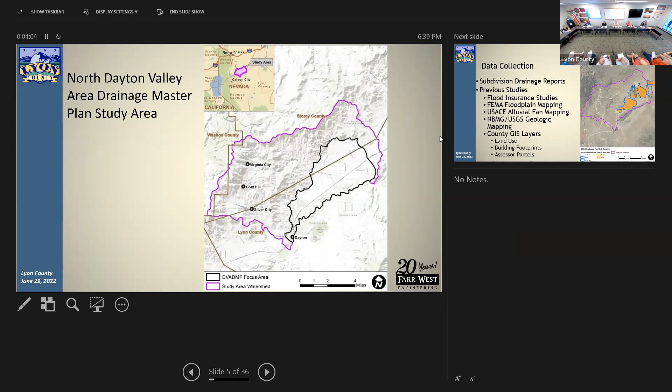So starting out with any drainage study is a lot of data collection. So Farr West and their team took a look at the past subdivision drainage reports that were prepared for all the subdivisions within the area. Also looked at previous studies such as the flood insurance studies. Mainly those are funded by FEMA.

Also looked at the FEMA floodplain mapping, the U.S. Army Corps of Engineers alluvial fan mapping. That's kind of what we show in those yellow orange areas. Those are the alluvial fans that are common on the north side. And the outline of them shows where there's a risk rating. So when there's storms, a lot of that alluvial sediment is moving through. So they're rated from medium to high. That's based on the Corps of Engineers mapping.

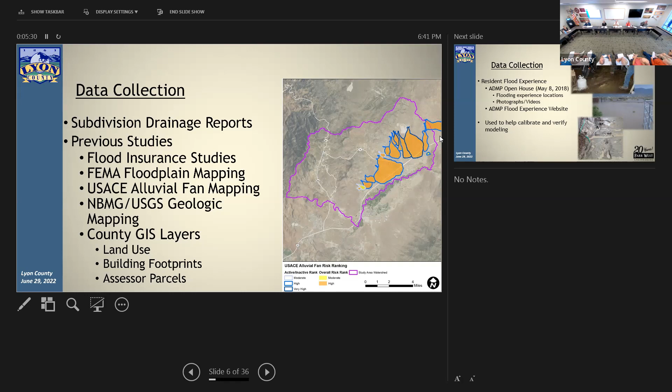Also, they coordinated with the Nevada Bureau of Mines and Geology, NBMG, as well as the U.S. Geological Survey for the geological mapping. And then they also coordinated with the county's GIS layers for figuring out the land use and buildings, et cetera. Because this model is a two-dimensional model, going into a little bit later, it showed how when a storm hits, how it moves through the areas, hits buildings, culverts, et cetera. So the GIS and starting with that data collection was the building block.

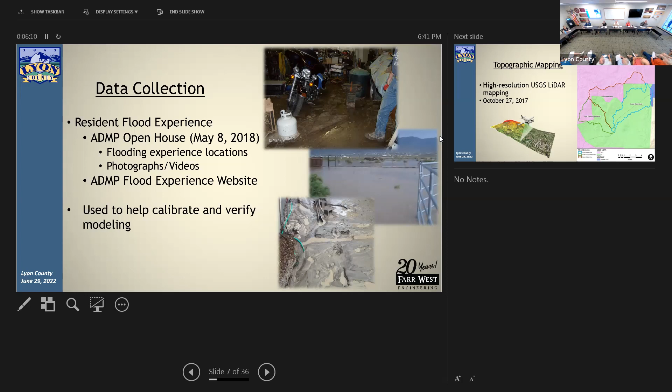Also, back, that's well over 4 years ago now, we had an open house where we got feedback from the public to talk about the areas where they've lived for a long time. Like Joey, I think he was here several times at this meeting, talking about what their experience has been, photos they've shared of where they've seen flooding, what affected their house, et cetera. And some of those photos are shown here. That was really useful so that you could calibrate the model of what it showed versus what was actually happening and what people had experienced.

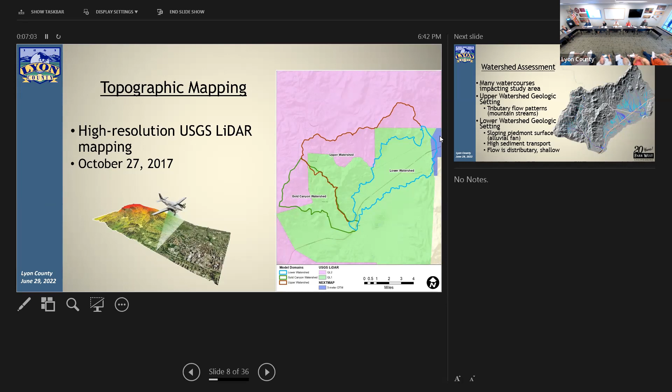The big issue was the topographic mapping. And the catalyst for starting this drainage master plan was that the USGS was going to be doing a LiDAR flight. LiDAR is a light detection and ranging technology that uses light, and they fly it with a plane, and the head measures down what the reflection is, and it creates a very detailed three-dimensional map. It's interesting that USGS was doing it to try and locate fault lines within this area. So we piggybacked with them to use that technology to create a three-dimensional model of the whole area that we could use within the model for simulating the storm events. And that was flown back in October of 2017.

So then based on that LiDAR, there's an outlook of what the detail shows. What that helped us, the modelers, understand about the topography out there is what's going on in the upper watershed. It's really steep. So understanding how the channels feed down into the lower valley area, and how those alluvial fans, or what they call Piedmonts, are fed by that runoff. And also looking at areas where there's high sediment transport, where there's a large runoff, people get sediment going up their basements or in their backyards, et cetera.

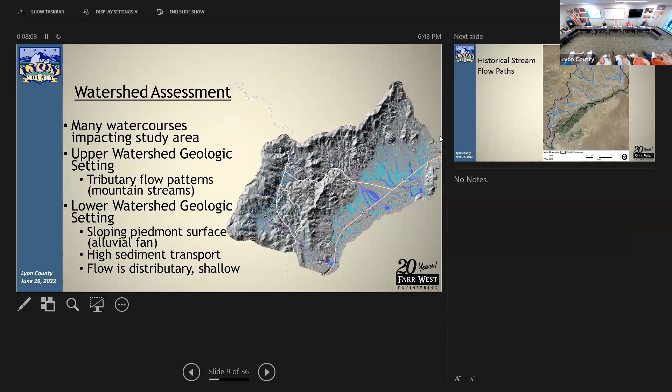Also it helped them see how the flow is distributed in shallow flows and how those shallow flows meander in alluvial fans during certain events. And you can see in this graph the blues, maybe I'm a little ahead of myself, but that's what a 100-year storm event looks like coming off of the mountains and flowing down to the river.

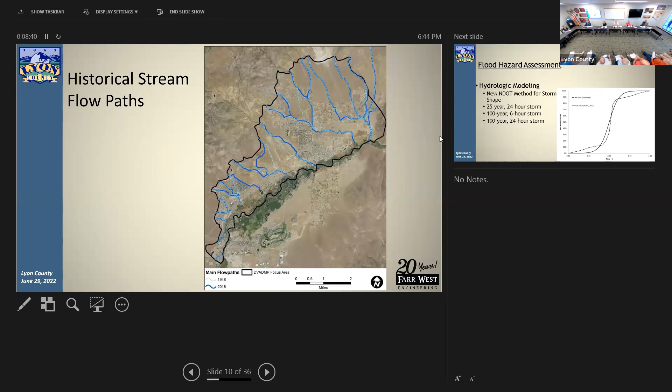So also we took a look at historically how the runoff has occurred, mainly the major channels. So you can see in the light blue where historically, back in 1948, when Jeff Page graduated from high school, and you can see how things change, and then up to 2018 with the dark blues. A lot of it can be changed by development, but a lot of it's just naturally how things change with large storm events, and it skips the bank, creates a new path.

Sorry about that, Jeff. No, you're fine.

So next was doing the hydrology portion of it, so running the storm event over the site. We use the NDOT's method for a storm event in this area. And we looked at 3 different types of events: a 25-year 24-hour storm event, a 100-year 6-hour storm event, and a 100-year 24-hour. Those are kind of in line with the Title 15 code for Lyon County on how we require development and others for stormwater detention, sizing culverts, et cetera.

And so that graph kind of shows on time and percent precipitation what happens, how a normal storm flow passes through and its intensity over that unit of time. So it shows us 1, but that could be over 24 hours or 6 hours. You just multiply it by that hour.

So then the flood hazard assessment, this is kind of where they got into the details where they started running the model. They took that LiDAR surface, applied that storm event over it, then see how the water comes off the hillsides and floods through the area. So they created like 3 different models, one in the upper watershed, the lower watershed, and the Gold Canyon, and they kind of knitted that together, just because the data was so huge, they had to break it up.

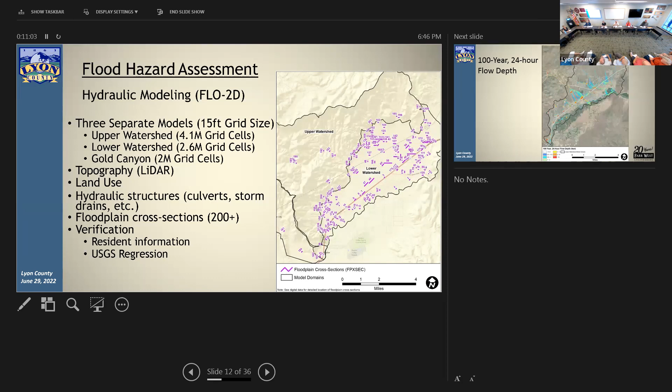There's a couple open seats up here if you want. Oh, okay. Nancy, can you hear me? Sort of. All right, I'll speak up.

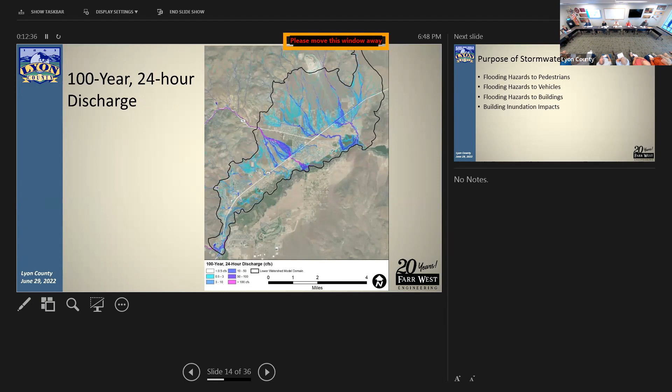So now we kind of know where the storms are occurring, where the water is running, where it's flooding properties, et cetera. So next: what are the necessary improvements to mitigate these flooding issues? We looked at the flood hazards to pedestrians, to vehicles, to buildings, as well as the inundation depths to buildings. That could be businesses, commercial buildings, as well as residential.

In the model, with that LiDAR, we actually got a footprint of every building and pretty much knew its height. So when that model runs through, if you've got it zoomed in, you can see how the water can move through the subdivision during that flooding event.

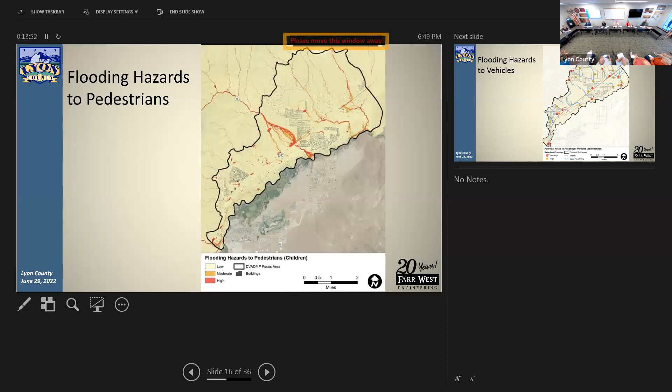What we used as pedestrians were basically small children, about 60 pounds or less. That's the risk factor, versus David Burketta's size, who's a big guy.

Then we looked at the hazards for vehicles, mainly where streams or runoff hit a roadway crossing. The benefit was looking at very high versus high risk. The very high were the red stop signs, and the yellow was where there's high risk. That gives the roads department an idea of where they should put up signage to warn pedestrians and vehicles not to cross this area, where you can see water crossing the bridge or the roadway.

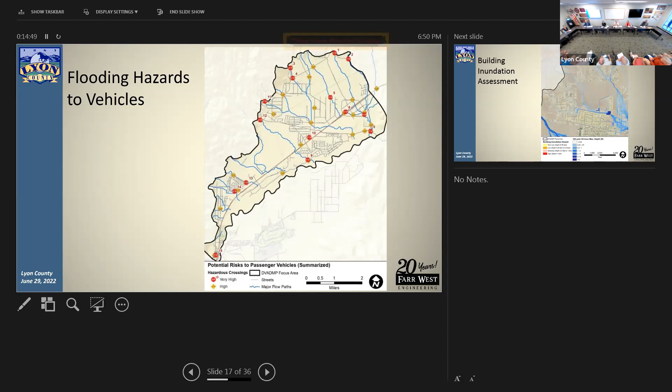What the data is used for in the future for the county, if it's adopted, is it allows the county to know where those depths are. So if someone wants to build a garage or a home, we can tell them what the finished grade should be so that it doesn't get flooded based on this information. So if you put in a permit, Andrew and his crew can zoom in on that area and say, okay, you need to be at this elevation.

Next, with that flooding, they asked, what is the economic cost to the entire community? That's where FEMA has this HAZUS analysis, a program model that says, if you have this flooding and it's this deep and you have this type of building, what are the damage costs for the replacement or repair of that facility?

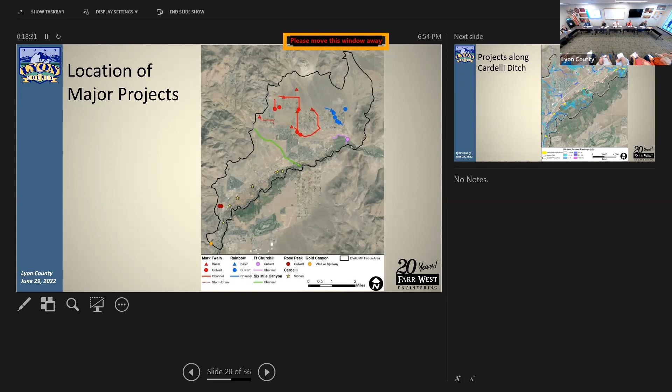And then 2 other areas are in bright green. That's the 6 Mile Canyon, which mainly just said we need to create a bigger channel, just to channelize that, so it doesn't go into that alluvial fan type of a situation. And then the last are along Cardelli ditch, which are those diamonds. I'm sorry, not diamonds, the stars.

And then this kind of zooms in where along Cardelli ditch there's a lot of those drainage paths that cross over or hit the ditch. And what happens is that under the 100-year storm event, it just takes the ditch out. So we're looking at, okay, what can we do to get the water either over or under the Cardelli ditch so that this will mitigate irrigation, the uses of irrigation, as well as for safety.

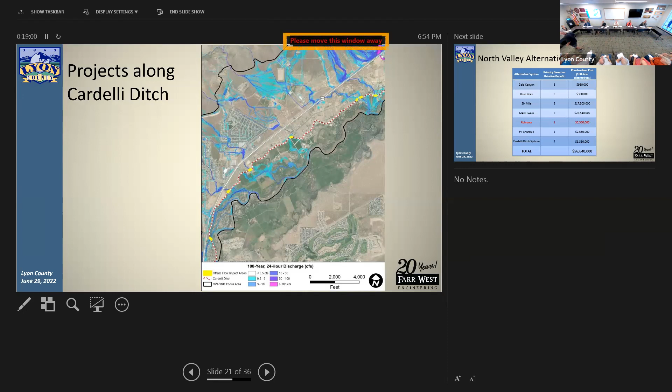So that concludes the North Basin. I'm going to move now on to the South Basin. I'm going to skip over the process they went through to do all the hydrology and the LiDAR and all that, because basically it was all that same data. So we took it another step and moved over to the South Basin. So here again, I won't use Jeff's name again on this, but it does show the 1948 drainage areas and the old channels and the new channelization through the basin area. The limits of this project are shown in yellow, which is basically everything south of the Carson River, and then up about midway up the hillside of the foothills there.

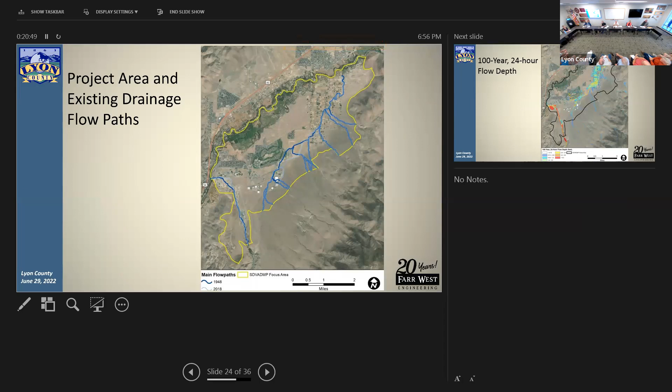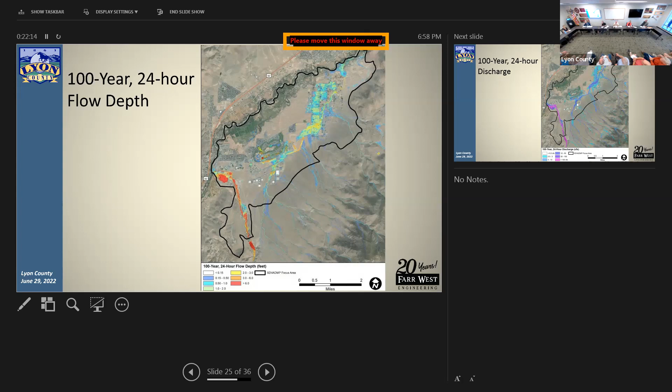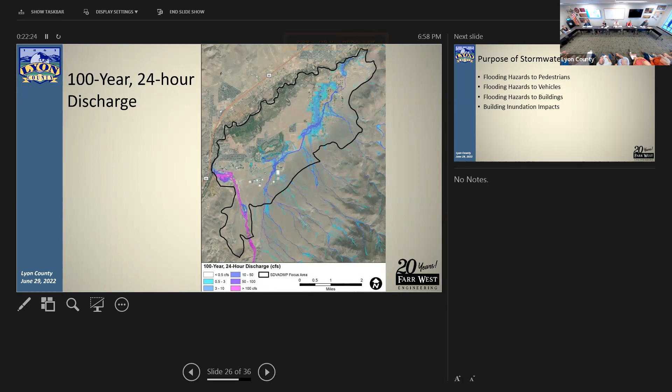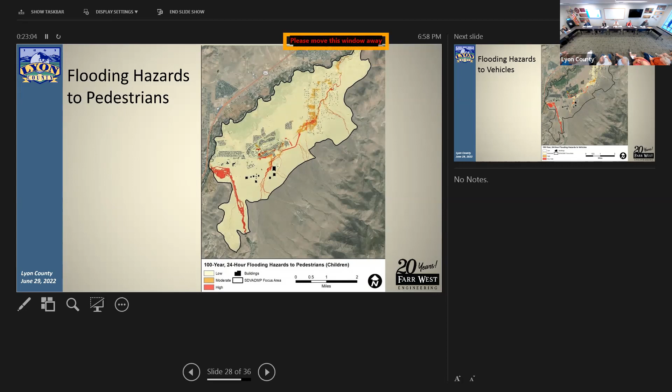Same process to look at what are the necessary stormwater improvements. We used the same criteria for looking at pedestrian risks, vehicle risks, building risks. So here we saw where the high and moderate risks are identified for pedestrian crossings, or you can just be out in the backyard. You can see where most of the drainage is staying within natural drainage areas or within detention ponds. But you can see that in areas where it gets really flat and spreads out, in the Ranchos area, the runoff has a hazard to small children.

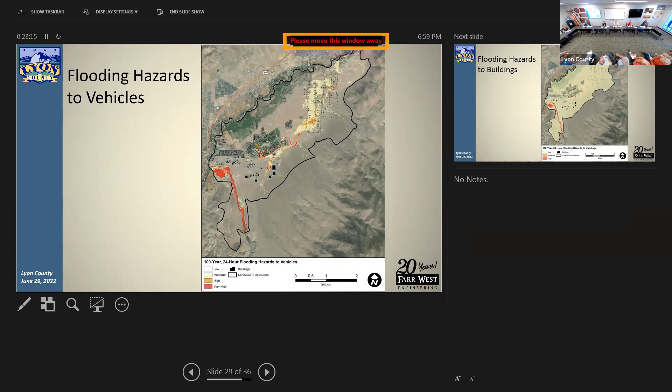They have water at your threshold, but a lot of it's going to be in the Ranchos area. There are some areas around the golf course that were identified in this model. And this shows the building inundation assessment, zooming into the Ranchos area where we saw that there were quite a few homes. But historically, I think most of you who are from the Ranchos know that that does occur during the large storm events where you've had that flooding. A lot of it starts picking up at the intersection of Sutro and Dayton Valley Road.

And then we ran the FEMA HAZUS model to quantify those costs. And again, the 100-year 24-hour storm event is the most costly. This one ended up being about $7.65 million. You recall the North Valley was about twice that. I think it's just because of the density on the north side, and there's more commercial and industrial properties on that side versus the South Valley. And you can see how it's broken down; the residential takes up almost 80-90% of the cost.

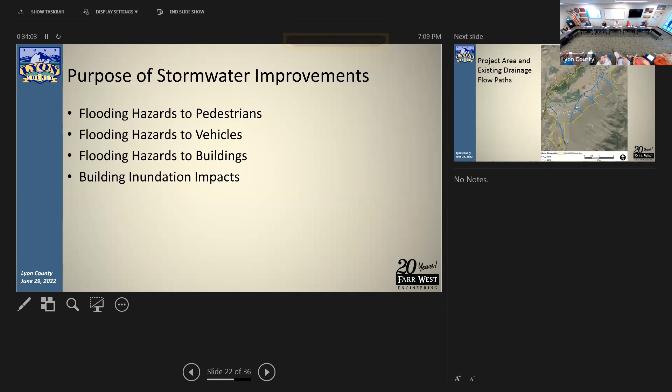However, it seems to me like some retention ponds up into the basin could be some smaller ticket items. Because if we're waiting till phase 9 to get the big bang for our buck, the majority of us are gonna be dead. You know what I mean? So, when the engineers came in and did this, did they offer up some short-term solutions such as retention ponds?

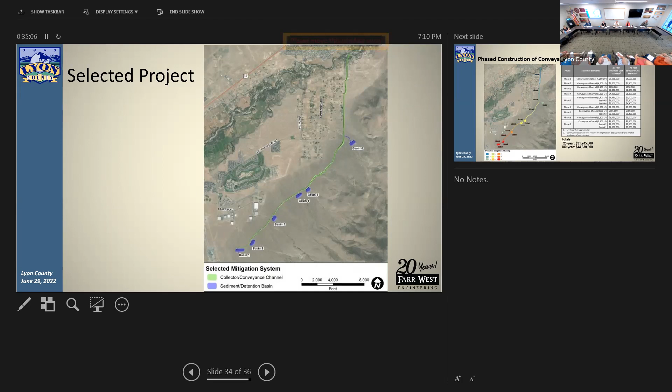Not that I recall, but I'm a civil engineer as well. When I look at this, what's shown in the blue, the drainage basins, those could be built first to serve as a retention of the runoff from those areas, and then slow the flows down, drop the sediment, and then let it continue on. And maybe with the control of that, you could slow down that flow, so it's not as big of a hit further down.

And then as you put in a road, or you put in the channel, they can start collecting that and diverting it all to the river rather than let it just follow its natural path. So there could be a step we can take to soften that.

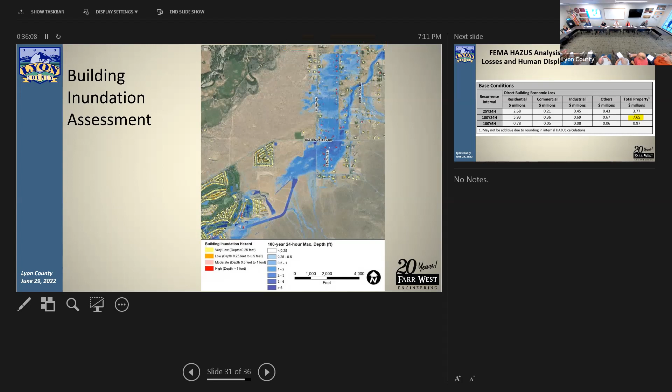So if I may, if you look up at the map, there's already retention or detention in place in portions of the project that need to be cleaned up. So that's one of the short-term things we could do. The deep dark blue, big white area there is one example. In 2015, 2017, and in 86, 97, 05, that's where it all came off of there. The difficulty that we have is we don't own that. It's private property. So we did do some work after the 17 event, Dustin?

Yes. After the 17 event, and that was a fun event, we met with the property owner. They gave us permission. We went in and did a ton of work to clean some of that out. The problem is once you have a significant rainstorm, it doesn't even have to be a flood event, those areas fill back in with silt very quickly.

And I'm not here to cause another controversy, but we have a large number of people who like to ride their ATVs out there. They destroy our basins very quickly without even realizing that that's what they're doing. They're just up there playing and having a good time. But there's a challenge with keeping those maintained to take that water. So that's part of the difficulty of it.

But we do have things in place that, yes, we can do stopgap measures and band-aid it along until we get the entire thing built. Part of the reason why we're asking tonight for authorization to move forward is the majority of the pre-engineering is done. We can apply for EPA grants to start working on these projects and to start building the infrastructure.

It won't pay for the whole thing all at one time, but it gives us the opportunity to keep moving forward, either EPA or mitigation grants through FEMA. So that's why we're asking now, because we have the pre-engineering done. There's been more money put in by Washington into both EPA and mitigation dollars. So we're trying to get competitive with the rest of the state and be able to get funding to put those things in place. So this basically provides justification for us to implement it.

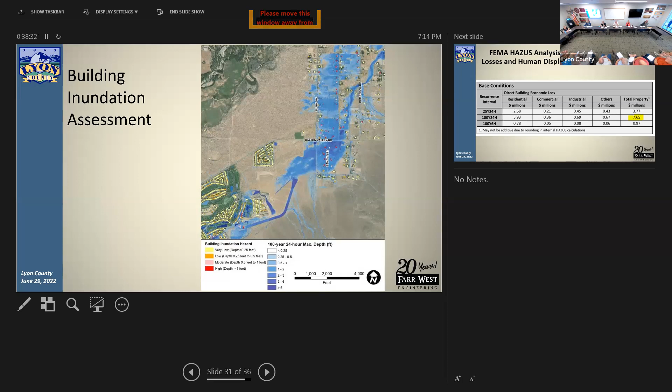Yeah, so on the El Dorado Canyon, because there were no residential areas at risk, and it's within that very defined area, and it's not jumping its banks, in our improvements we're not even touching El Dorado. We're catching everything to the east of it that's coming down and moving off to the east, that's hitting the airport area, the industrial park, and the residential.

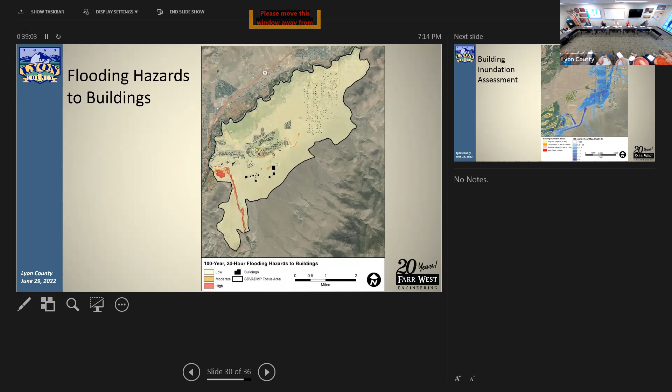So go back to that one slide that had the phases on there. Yeah. Because El Dorado shoots directly into the... Right, because it comes down. So what I'm curious about, because this is where a lot of the runoff comes into, is down here in this area. Right. So did the study look at doing something in the interim until we can get this built, to give some protection to these folks down here?

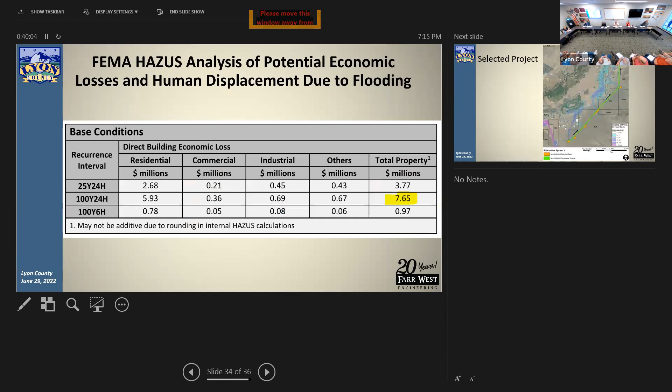Yeah, there you go. So the last two basins, the farthest upstream, are capturing that one drainage area that's going through just before the industrial park. Because again, we identified BLM, and doing anything on BLM takes 6 years.

Well, now you brought that up. And this is probably a question you can't answer. But is there any way we can make BLM pay for some of this, since it's their land that the water's running off of? Probably no. But you guys are in the process of obtaining that BLM land. So we'll still pay for it. Yeah, exactly. You'll pay for it, yes.

Commissioner Ogden. You basically answered the question I had, what can we do to mitigate the problems before we worry about starting at the river? Having been stationed up in Rapid City, South Dakota in 1973, which was 10 months after a flood, my concern when I moved there was that 238 people got killed at 2 to 6 o'clock in the morning when the flood came. So I honestly think we need to do something to stop the headwater up there before it takes us out.

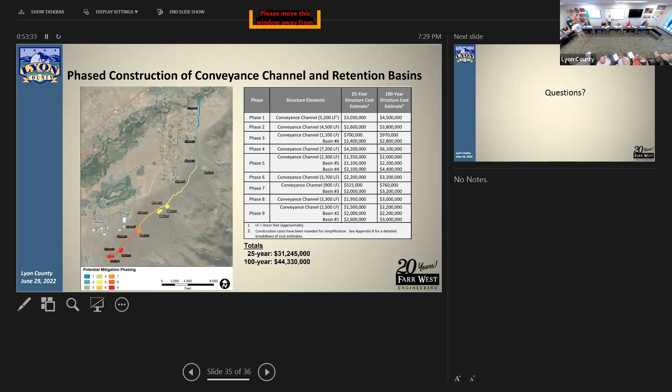I don't know, I live on Sutro Road and it gets flooded. So I'm in the low spot. I'll turn that over to these guys. I'm just gonna tell you the truth, it floods. Because the mountain's above me. I'm not gonna dispute geography. Yeah, so you can see where you're off of Sutro. Sutro Road and Dayton Valley Road. Yeah, so right there is where it shows flooding.

But with these improvements here, we're gonna be able to capture all of that runoff so that it doesn't get past this fence line, and it gets into this channel that then flows downhill to the river. So it's gonna flow all the way from the pit, all the way down? Yep, we're trying to capture it all the way down Cobalt and out to the river. Because right now, the natural drainage channel falls along through here. But because of the development and all that's planned through here, we're trying to mitigate.

Can you guys speak up so the whole audience can hear? I'm just trying to take. Yeah, I know, but they can't hear you back there. Sorry, we're getting other conversations, so it's going to drown out.

Because it goes uphill as you go up towards Como Lane. This is gonna be a deep pipeline. No, it's all gravity. You may have a high point right here, but by swinging out a little bit further to the east, by gravity, we're gonna allow it to get on to the river. Okay. I don't think it's gonna work, but.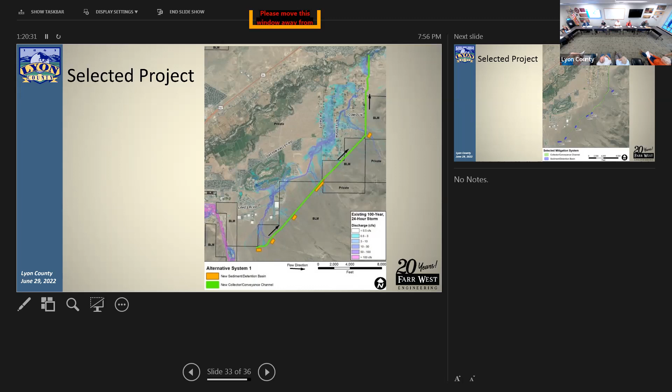All right, seeing no further questions. Sure, let me check Zoom real quick. Oh, that's right, we got Zoom going. We have KW and Rob Heisel. Oh, no, Rob. No, Rob, sit down. I can't hear him. Mr. Heisel, you can speak. Oh, I was going to say, the chairman may want to have KW speak first. Whoever KW is. The Zoom caller KW. Okay, if KW is unavailable, can I go ahead? Okay, sir. I'll wait till Lydia gets back. Everybody clap when she comes back. You're really bad. You gotta be lighthearted. That's the best thing you said all night. Can you hear me? KW?

So there was one question I think I heard also that I didn't answer, had to do with the impacts of this channel on the Carson River, maybe like sediment and water quality issues. The sediment detention basins are intended to drop the sediment, but the report really didn't go into water quality impacts to the river. However, as part of the permitting process, we're gonna have to address that with NDEP. Lahontan will catch it all. Yeah. What they don't catch, Churchill County will get.

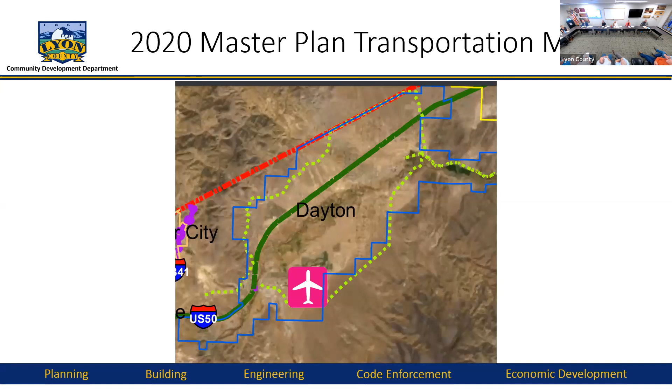As I mentioned before, in the 2020 master plan transportation map, the Cardelli option was actually removed, and the Shabs option was left in, as you can see here, that green line following the east. So I'm going to talk a little bit about each option, kind of what it would look like and what are some of the challenges really.

So first I'm going to start with the Cardelli-Sutro option. This is the potential alignment of the Cardelli-Sutro option. You can see it would follow Cardelli Road, basically across from the Maverick Station along 50. It would come down, cross the Carson River right where the disc golf course is currently, and then pick up Sutro Street Road on the south side of the river.

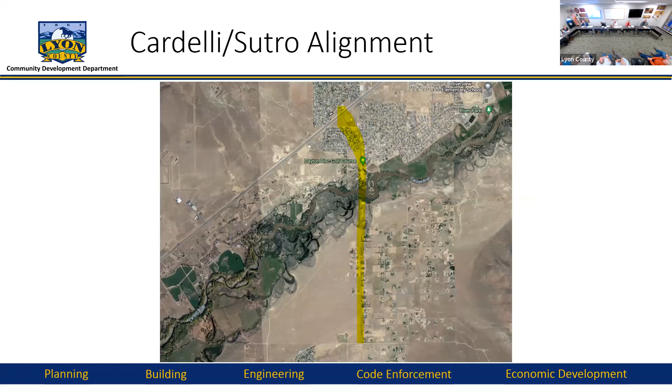So the Cardelli-Sutro option would include about a 1,300-foot bridge connecting the south end of the existing Cardelli Road to the north end of the existing Sutro Road. The project would involve obtaining 70 feet of additional right-of-way along Cardelli and 50 feet of additional right-of-way along Sutro. That's really going to be the big challenge with this option if it was picked.

The bridge has to be so long because of the floodway that runs through along the Carson River. You don't just have to cross the river, you have to cross the entire floodway, otherwise the bridge would flood when it flooded, and you would have some major issues. It wouldn't serve its purpose.

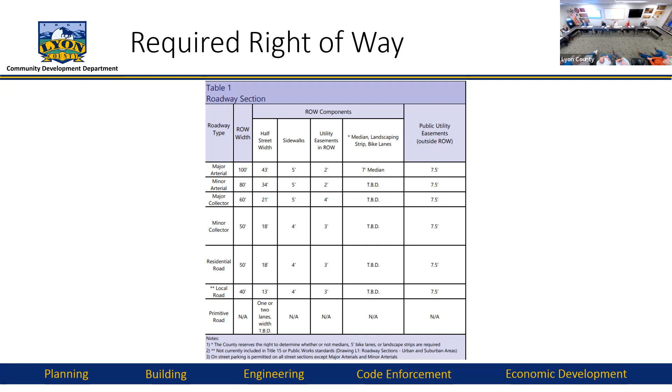Going back to the roadway required right-of-way table that's in the master plan, you can see that the smallest roadway that we have listed here is local road, and that requires a 40-foot easement. So this wouldn't technically meet today's standards. The road is older than these standards. The primitive road is not outlined, as far as what a right-of-way width would be, but it would more fall within that.

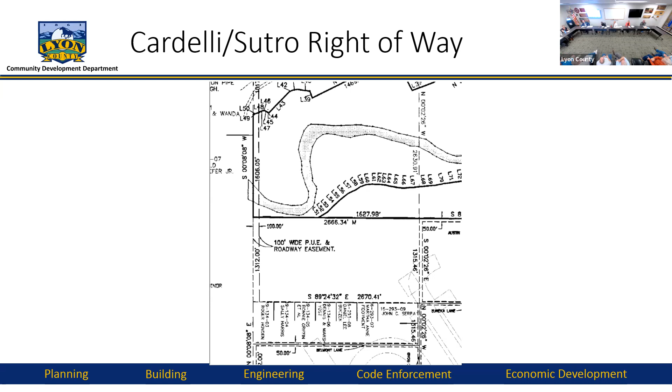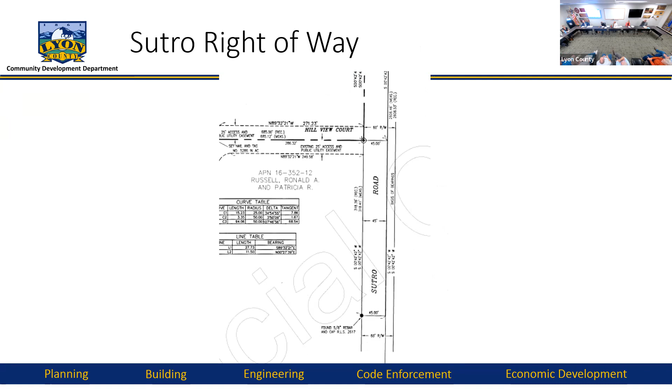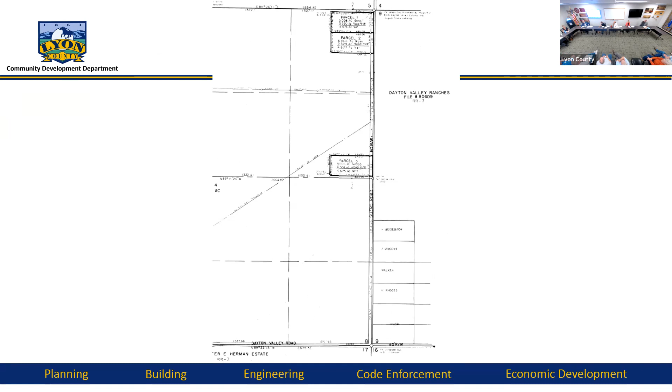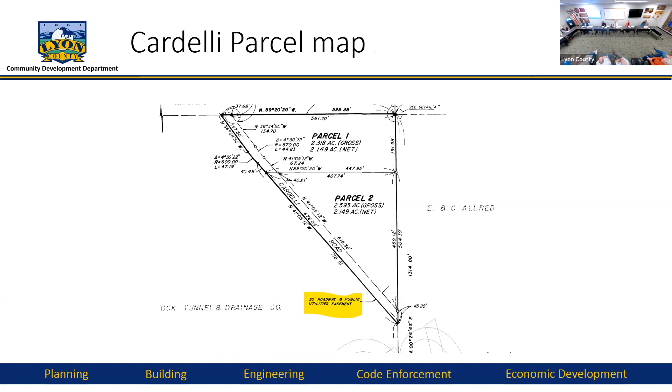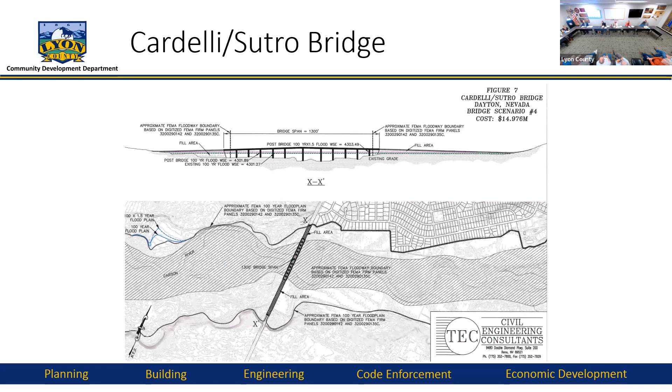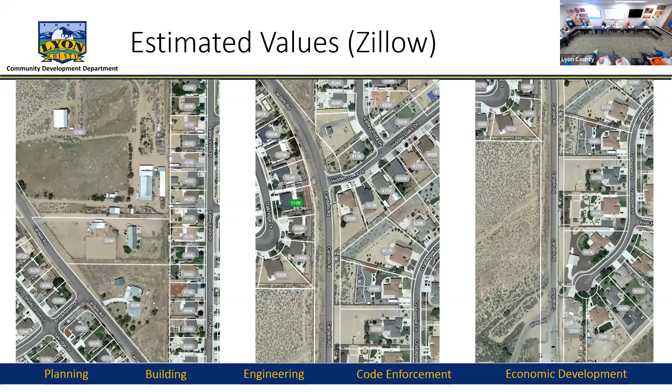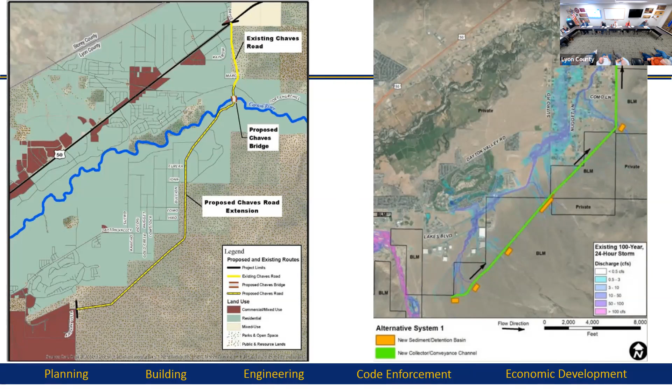I don't know, we'd have to look into that further, but it is something that I did want to point out. The aspect on these are a little bit different, so it looks like it's a different shape. The one on the right doesn't go as far north, so I just wanted to point that out. There would also be a connection in here to Dayton Valley Road, which is not on this map here on the left. So I just want to point that out as well.

The Chaves option is a 300-foot bridge at the far east end of Dayton Valley, connecting the planned extension of Chaves. The right of way for this option is mostly through BLM property and through proposed development, and I'll cover that a little bit more in a minute. That section of the roadway would be paid for by developers because this is in our master plan. The developers have to develop that section of road that goes through their property, and I'll show you what that would look like in a minute.

And then, as I talked about before, it may be possible to combine portions of the project with the South Dayton drainage improvements. That's not a for sure thing. Again, all the engineering would have to be done, and we'd have to show that it would all work, but I do want to point that out. So here's the proposed Chaves bridge. It's a much shorter bridge. That's because the floodway down there is much more narrow. And so you can put in the 300-foot bridge.

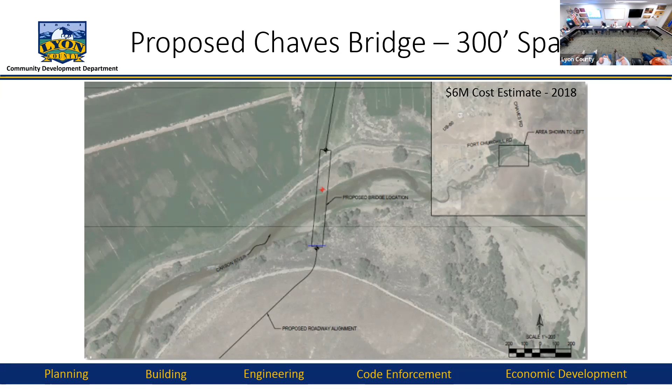The estimated cost of this bridge in 2018, so again, it has gone up, but probably not as much as the last one, was $6 million. So remember the Cardelli option was studied in 2008. This one was studied in 2018. Sorry, just wanted to make sure that was clear. That's still too low. For today's prices, that's low. Yeah, I don't dispute that at all, but at that time, that's what was called out as a rough estimate. So again, you would have to go through all the engineering to figure out the actual cost in today's dollars. Still gonna be much more palatable than the other option. Right.

So the Chaves alignment there, you can see the north section of that goes through BLM property. That entire section is BLM. There's an existing 25-foot prescriptive right of way through the BLM property. We would have to go to BLM and get that widened, which we will be working on if this is the option that gets picked. Through private property down there, there is a small piece where we have an 80-foot width. And this connects to Fort Churchill Road. So that gets Chaves all the way to Fort Churchill.

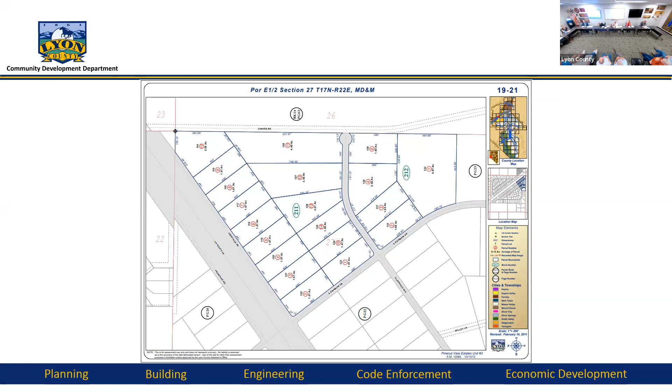This is the expired tentative map for Aspen Creek. I just talked a little bit about that section, but it does show this road through there. And as I mentioned before, if somebody were to pick up this development and actually build something there, they would have to build that road. Now, this tentative map was expired, so they would have to come forward with a new tentative map, start the whole process over again, if that were to happen. But I do want to point that out.

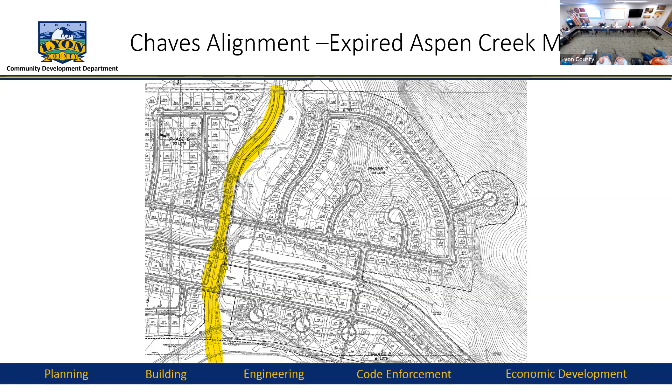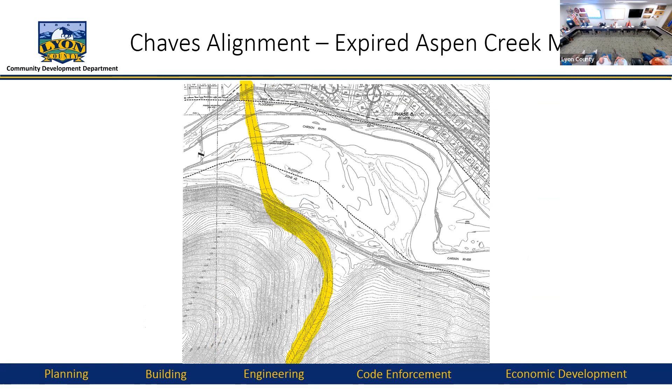That's private land that at least somebody at some point was talking about developing, and I would imagine that somebody will bring a proposal forward again. Here, that actually gets you all the way across the river because they own both sides of the river there, and this shows the proposed alignment there. Then you go to the Chaves alignment, and this is the proposed Fiddler route through the 900 and some odd acres that they own on the south side of the river there as well. And it shows it connecting down.

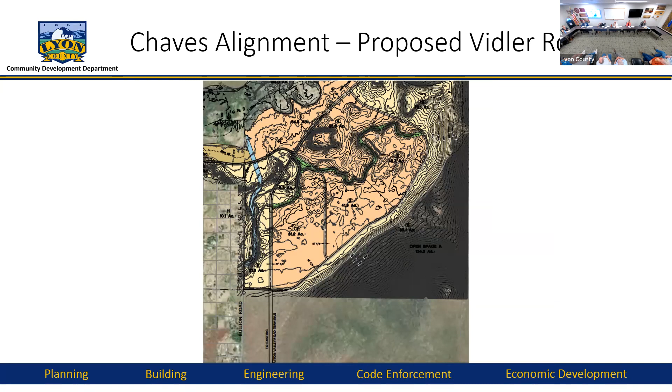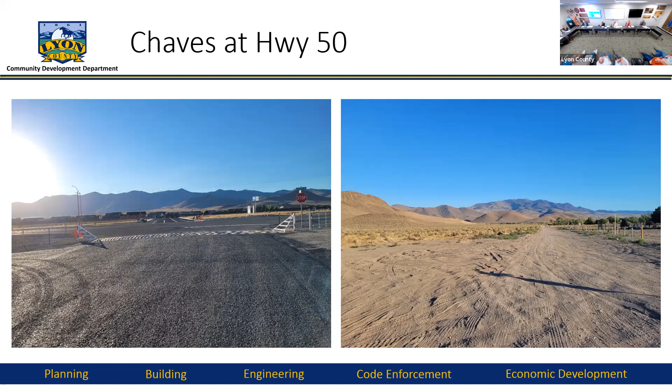And then this is Chaves at Highway 50. You can see across the way, this already connects into Copper Canyon. I'm not going to scroll back through. I should have pointed this out when I showed the 2010 transportation master plan, but it envisions a loop road all the way around Dayton. And essentially, the part through Copper Canyon is a part of that road. So this alignment actually already naturally connects with that loop road. And you can see here on the right, that's looking south again, towards the river.

So I put together, and this covers the same information, a summary of the two options. The Cardelli/Sutro option, that's a 1,300-foot bridge span. The estimated cost of just the bridge in 2008 dollars was $14.967 million. Significant right of way is needed through private property. That's estimated at $10.245 million. These numbers are not including the well, which would have to be relocated as well.

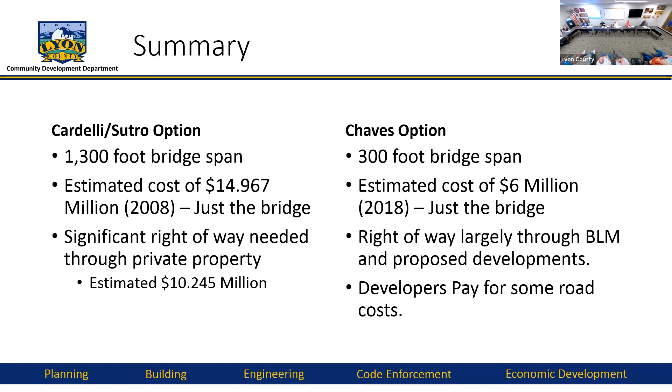The Chaves option, it's a 300-foot bridge span. Estimated cost in 2018 dollars was $16 million. That's just the bridge, or $6 million. I'm sorry. So thank you. $6 million, just the bridge. The right of way is largely through BLM and proposed developments, and the developers will have to pay for some of the road costs as they develop out the property. So with that, I'll take any questions. Open up the board for questions.

Yeah, I just got one question, Andrew. So besides the BLM land, you got the developers' land. So if they don't come forward by the time we're ready to build this, we'll be looking to buy 100-foot right of way from them at whatever market costs are. Correct, yeah. I just wanted to put that out there. We hope the developer's gonna pay, but if we're ahead of them, it could go the other way. Correct.

So I know Vidler had talked about it a little bit in an open meeting a few months back, and they said that they were willing to work with us on that piece. If this is the direction that the board goes, we would start working with them on that to make sure that the right of way was secure. But yeah, you're absolutely right.

It seems like... Thank you, Chairman Gray, and Mr. Haskins, thank you for the presentation. It seems like from past public participation, one of the concerns about the Chaves was that no one's gonna maybe need to use it because it exits out farther east on 50. And so it's not gonna really cut down on congestion a whole lot.